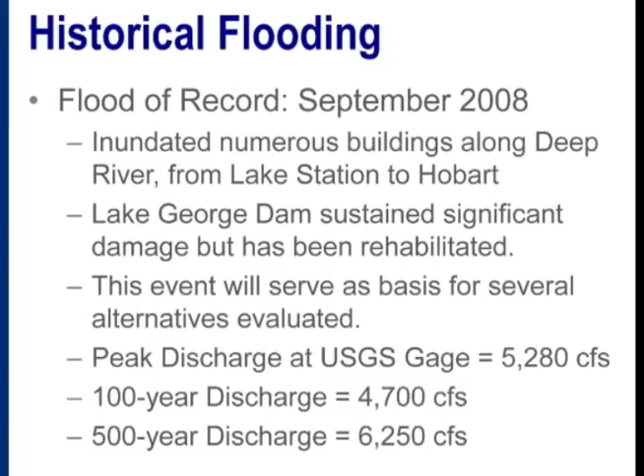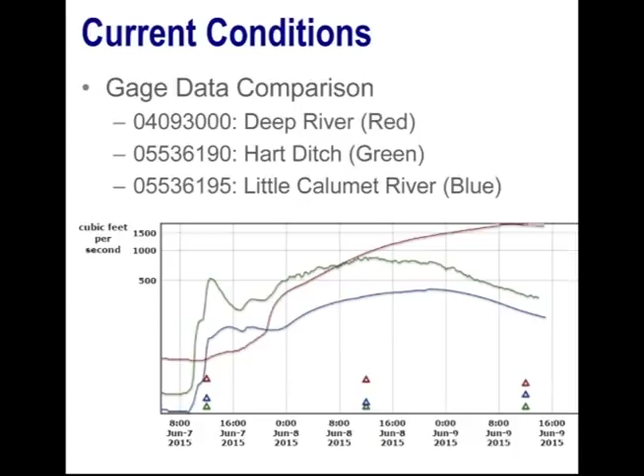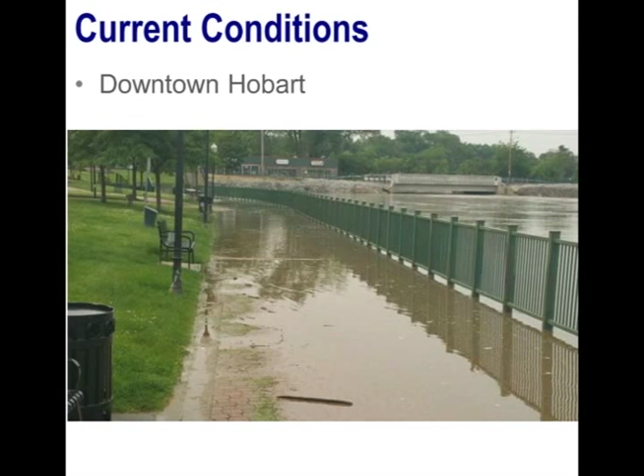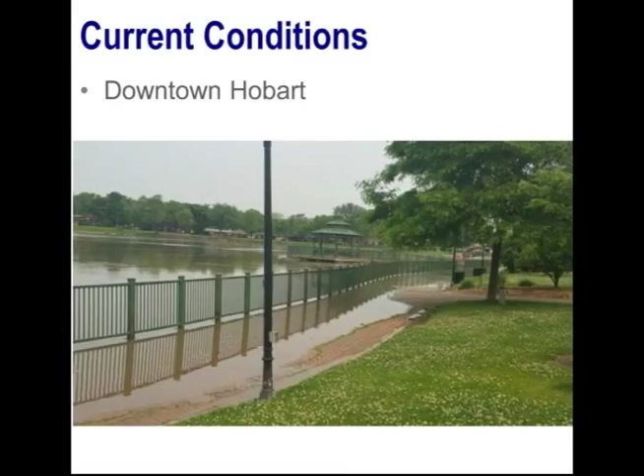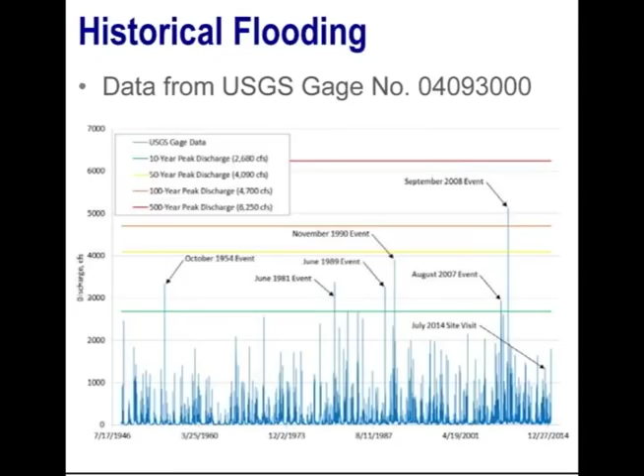Obviously, as I mentioned, there is a need to better understand what's going on with Deep River, and in order to do that, the first thing we did was collect several previous studies. We don't want to be duplicating any effort and want to make use of previous studies, of course. We also collected several hydraulic and hydrologic models that had been prepared by the DNR and the Corps of Engineers and the MWRD, and also FEMA.

I'm going to go through some of the key points of those previously established hydraulic models. I think our goal going into this was that we could make use of one of these previously created models and just modify it, update it, and work from it. The DNR's model is considered the effective model for the reach, and generally speaking, it has not been updated in quite some time. So when you look at the cross sections of the stream that are used to define the system, they appear to be based off of some approximate contours.

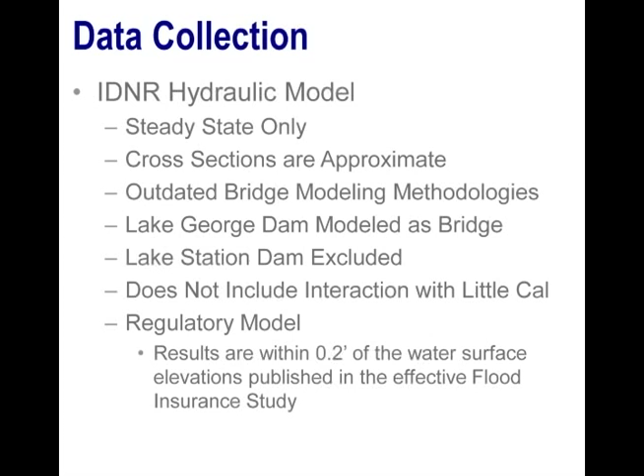We also obtained a hydraulic model from the Corps of Engineers. This model had really similar cross-section geometry to the DNR model, so again, very approximate. But there were some really good things that could be taken out of this. The first thing is that it included the interaction with Little Cal. The DNR's model doesn't—it isolates Deep River. And we'll talk about that in a little bit too.

If I could add, I believe that was all flown in the 90s. I don't know how much of it was updated in the model, but a lot of the design work for the federal system was done off aerial topography flown in 1990. Thank you.

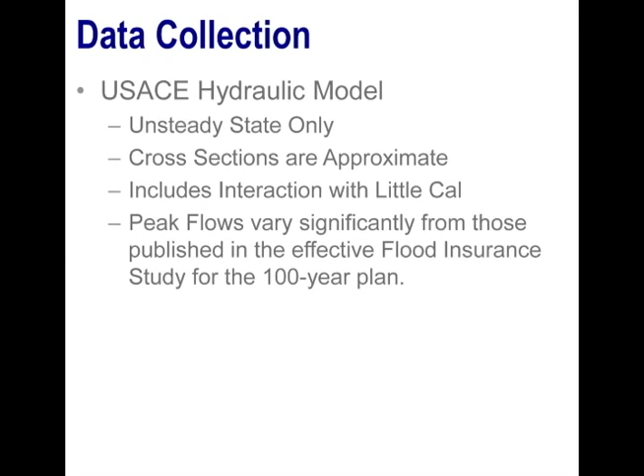So the last hydraulic model that was obtained was from FEMA, and actually FEMA's contractor, and it was pretty much the same thing as the DNR's model, which is to be expected. Actually, FEMA's model seemed to be less up to date—there were some changes made to the bridges in the DNR's model that didn't show up in FEMA's model.

We also collected some hydrologic models, which are useful for modeling the September 2008 event and some other historic events. But I think you're gathering what I'm getting at, and that is there are a lot of discrepancies with the models that had already been created, and the data was old. There were old methodologies being used, etc.

So we decided that rather than trying to work from one of the previously created models, it would be better to take a fresh start. So with the hydraulic model, there are two main components. The first one is what we call the geometry—basically, you need to define the stream, hydraulic structures, things that impact the flow.

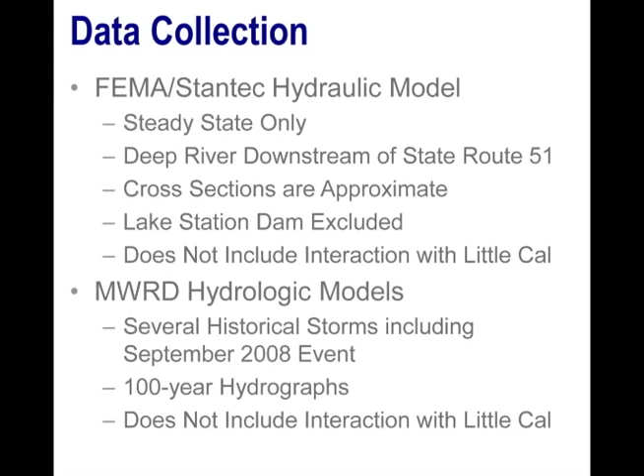And then I wanted to show you the improvements that were made by conducting the survey data. Because when we create a more accurate representation of the bridges and the dams and whatnot, we are more accurately estimating the losses associated with each of those bridges, and we're creating a more accurate model overall.

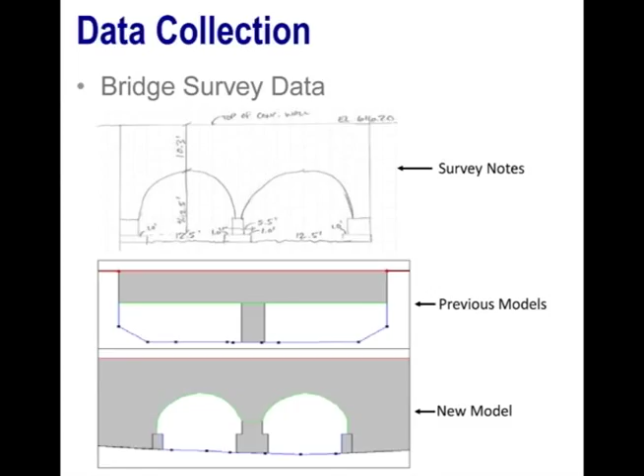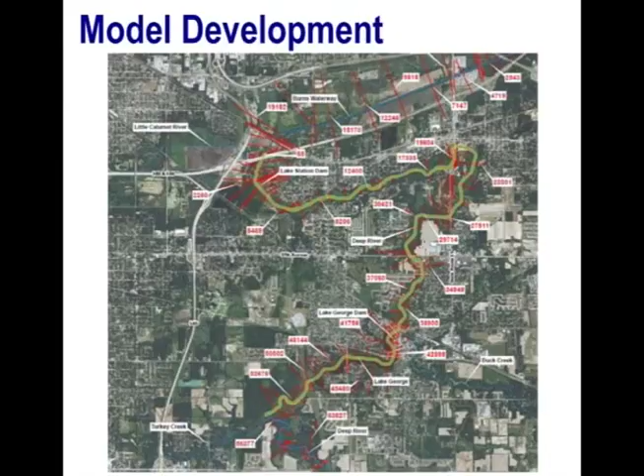This model that we created included 16 miles of Deep River and also Burns Waterway. To define the channel, we cut 126 cross sections, and there were 24 bridges, those within the study reach were surveyed in detail. And of course, we've also got the two dams within the study reach that were included in the model.

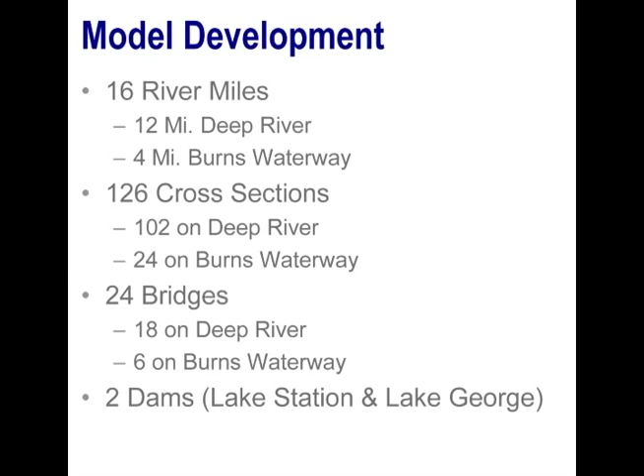We created both a steady state and an unsteady state model. The steady state model is what's required for regulatory purposes, and that's just a snapshot—you take your peak discharge and look at what that profile looks like. But the unsteady model allows us to route a hydrograph, an actual event, through, and we can look at the impacts of loss of storage or addition of storage and how that could be beneficial.

Because MWRD had some comprehensive hydrologic models already created, we did not repeat any of those efforts. So we did not develop any new hydrology as part of this.

Something I want to note is that we used the LiDAR data and the bathymetric data, and we used software that enabled us to create a georeferenced model. Basically, that helps us on the backside because we can automate the floodplain mapping.

I'll be showing you some figures showing this area would have been inundated based on our modeling results. Well, that was possible because the model was georeferenced, and being able to develop those inundation maps, it can be a useful outreach tool also.

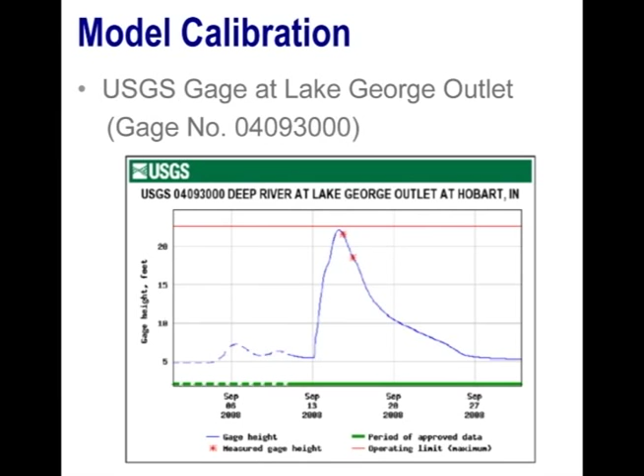One thing that occurred during the September 2008 event that ended up benefiting us when we were looking at this model is that the USGS went out and collected data on the high water marks. They went out and surveyed all these high water marks, and there were 28 of them within our study reach.

They categorized them based on the accuracy of the survey. 27 of them had good ratings, which is within 0.05 of a foot. The last one was a fair rating, within 1/10 of a foot. So pretty good survey data.

It's not all that common that when we're developing a hydraulic model, we have this quality of data to use for calibration.

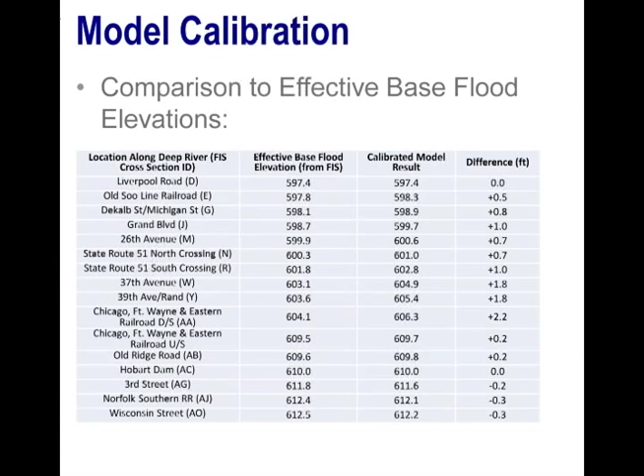Looking at the numbers is one thing. I think the better question to ask is, how does that impact people? How many people would be impacted by that? So I pulled together an inundation map.

According to FEMA, yep. FEMA's the one that makes everybody pay flood insurance. Right, so that has an impact on everybody sitting here that lives in this marsh. So how old is that data? Does it change like the other data?

It has not been updated. Since when? The elevations have not changed since the 70s.

So, wanted to know how does the inundation area based on our modeling results compare to what FEMA thinks would be inundated during an event. Generally speaking, although we had that increase shown in that table of 1 or 2 feet throughout much of the study reach, those increases were generally in areas where the floodplain is fairly narrow, so there weren't necessarily properties added to the floodplain.

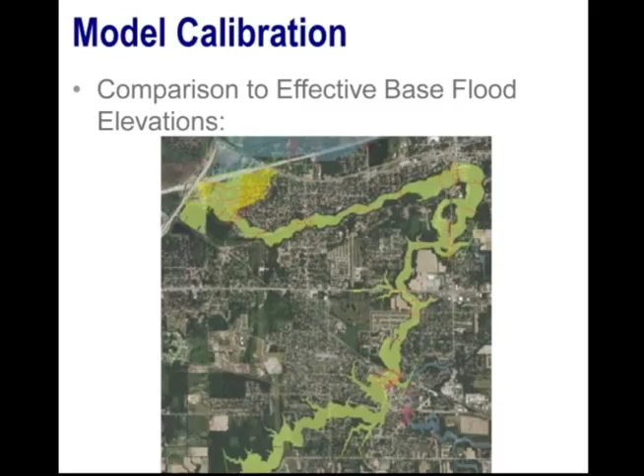Well, on that note, in order to update the maps, you need to prepare a letter of map revision to include that area and submit that to FEMA.

All right, so enough about the model development. Now that we've got this model and it's calibrated, we're ready to look at some of the alternatives, with the goal in mind, of course, being to reduce the flooding.

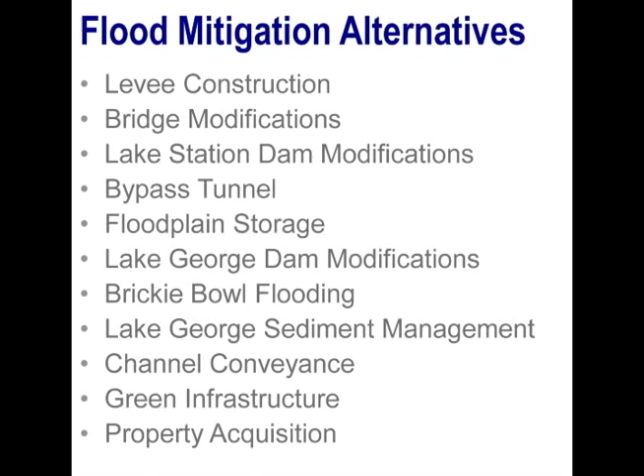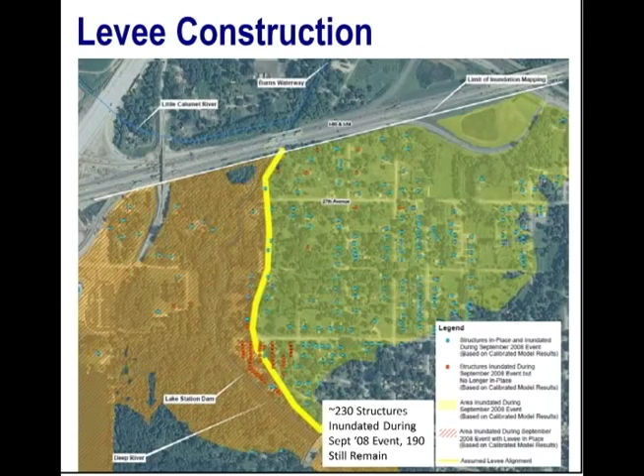I'm showing in the bright yellow here the alignment of the levee that we assumed. So what we're showing is the unhatched areas back here could potentially be protected if such a levee was constructed.

Normally, when you construct a levee, you're taking flood storage out of the system, so you might anticipate seeing some high water level increases due to that. But that area is extremely flat, and the storage that was removed was only about 1% of the total volume, so we didn't see any increases. The other factor that led to no increases in the base flood elevation was the fact that there are some significant tailwater conditions for Burns Waterway and the Little Cal and that whole confluence.

So when you look at some of the profiles of Deep River down there, it's flat for quite a distance. Those two things together led to a modeling result that showed you could construct that levee without causing any increases in the base flood elevations. But now what that means is that compensatory storage would not necessarily be needed. If such a levee was accredited, it would mean lower insurance rates for properties behind it, and it also removed the mandatory insurance purchase requirement.

There would be some properties that would need to be acquired in order to construct it. There's about 20 of them. And there are limited drainage infrastructure components in place right now, so you definitely would need to construct some of that, pump stations, storm sewer leading to pump station, that sort of thing, yes.

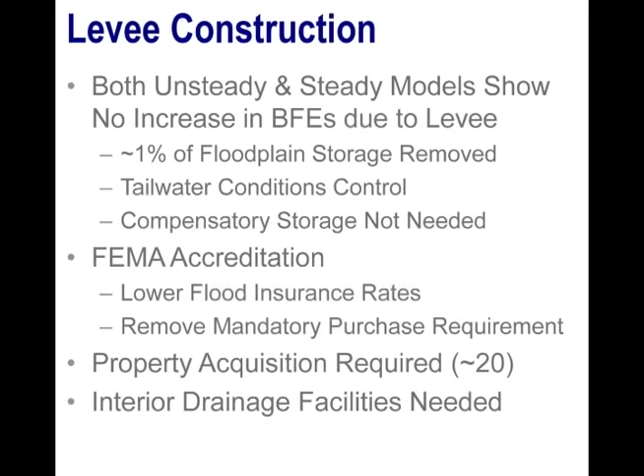Moving along to the next alternative that was looked at, something that really stood out when we were developing the model was the fact that there are several bridges that are creating restrictions which lead to higher water surface elevations upstream. An example of that would be the Chicago-Fort Wayne and Eastern Railroad Bridge, which is just downstream here. When you look at the hydraulic profile, this is a snapshot of some of the modeling results, and this was for the September 2008 event.

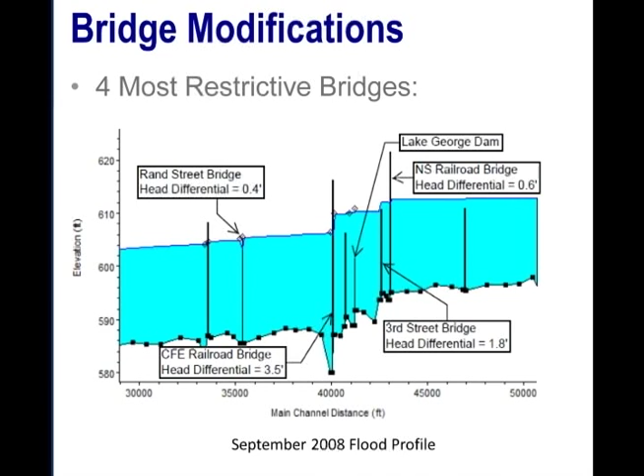You look at the water surface going up by 3.5 feet across that bridge. And we look at that as, if that bridge were reconstructed to effectively eliminate that restriction, that means that the water surface elevation upstream could potentially be 3.5 feet lower. 3.5 feet is significant, okay? And guess what's upstream? Downtown Hobart. So that was the kind of thing that we looked at for the 4 most restrictive bridges.

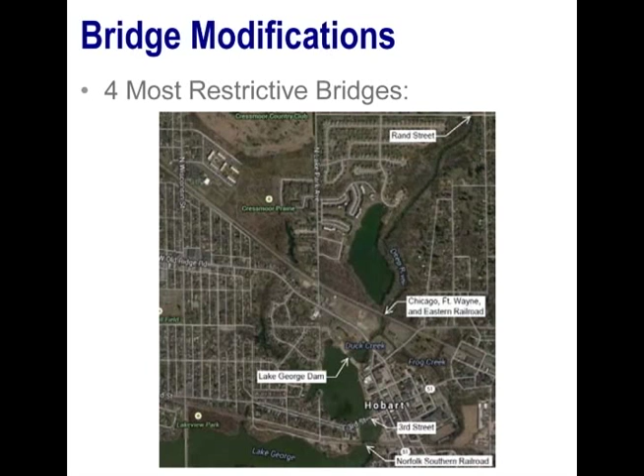The first, of course, is that CF&E Railroad Bridge. The next one is 3rd Street. And then the railroad bridge just upstream of 3rd Street, right here. And also the Rand Street Bridge. So those 4 bridges created the most significant restrictions. And just taking a look at those in plan views in perspective. So we're, let's see, right down here. Yeah. Okay.

So we looked at those bridges individually to say, if this one was improved, what would the benefits be, etc. But we also looked at those 4 together to say if all 4 of them were improved to effectively eliminate the restriction, how much lower would the water surface elevation have been during the September 2008 event for this area? And created some inundation maps based on that.

And you can see that the flood inundation area is certainly reduced. Actually, when you take out all 4 of the restrictions, you see a drop in water surface elevation of nearly 4 feet for this area, and it tapers off to about 2 feet, 2.5 feet for other portions of Lake George.

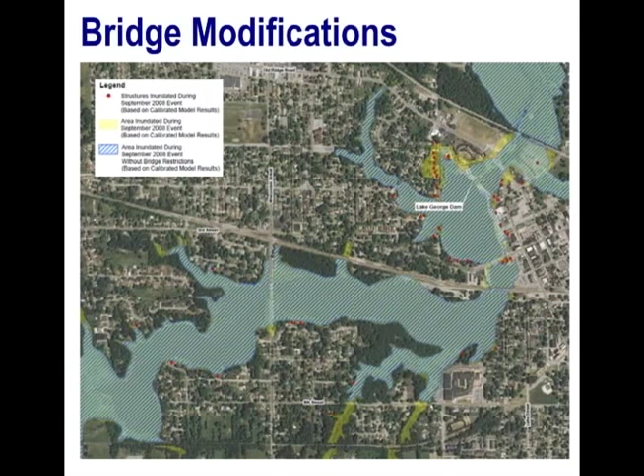If we take a closer look at that Chicago-Fort Wayne and Eastern Railroad Bridge, some of the things we considered there were, what if the bridge was entirely removed? Then you're talking about lowering the water surface elevations upstream by 3.5 feet for the September 2008 event. In order to eliminate the restriction, you need to provide an opening of about 70 feet. But we would recommend that you actually bring it back to the full bank width to prevent erosion and whatnot. And that would be 110 feet.

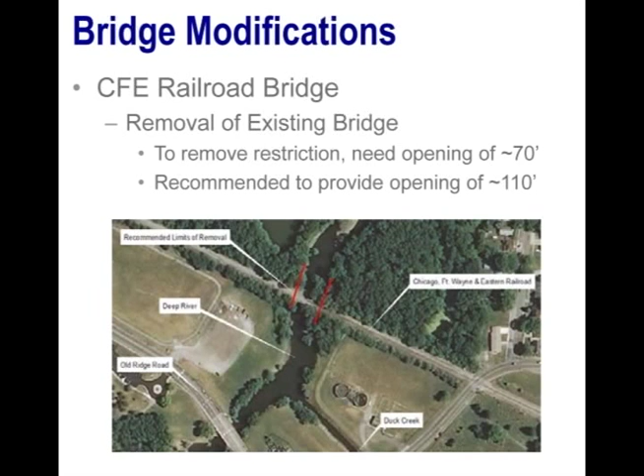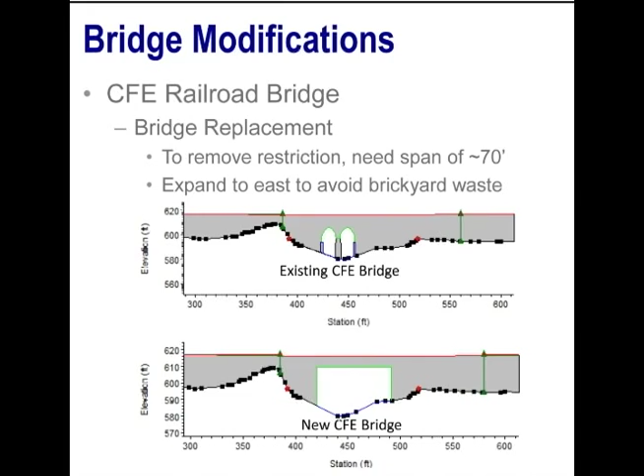And then if we move a little bit further upstream to talk about 3rd Street, when you looked at that profile of the September 2008 event, you can see that 3rd Street had a head differential of about 1.8 feet. So that means that the water surface elevation upstream of 3rd Street, in other words, for the majority of Lake George, was about 1.8 feet higher than it was downstream. And one of the other crossings that is upstream is Wisconsin Street. I'll talk a little bit more about that in a moment.

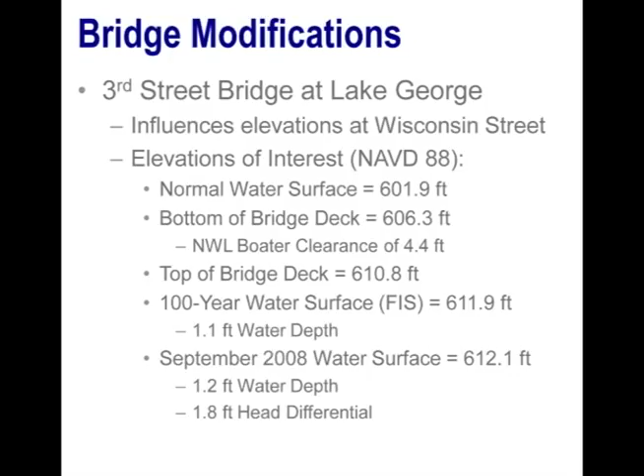But just looking at 3rd Street, the existing crossing has a current boater clearance of about 4.4 feet. And for the 100-year event, based on the flood insurance study, there's about 1.1 feet of water depth over the road. So of course it needs to be closed. And for the September 2008 event, we're looking at just slightly more water on the road. This is a photo from the September 2008 event. So the modeling results were pretty close there.

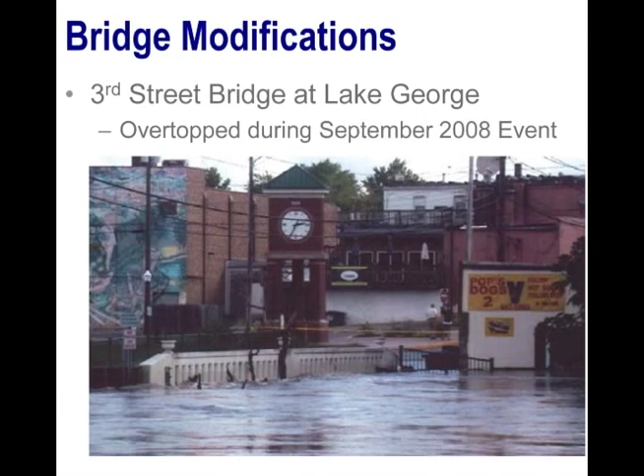I also want to just point out some of the debris that is accumulated on the bridge. We'll touch on that too. So if 3rd Street were reconstructed to effectively eliminate the restriction, it would mean lower water surface elevations for much of Lake George. And in order to eliminate the restriction, we looked at a case where the bridge was raised, but also lengthened. And it would take nearly twice the length of the bridge to eliminate the restriction. So that's pretty significant.

The new headwater elevation would of course then be lower, and the road elevation would be set to be at least a foot above the headwater elevation. That's an INDOT requirement for roads in this category.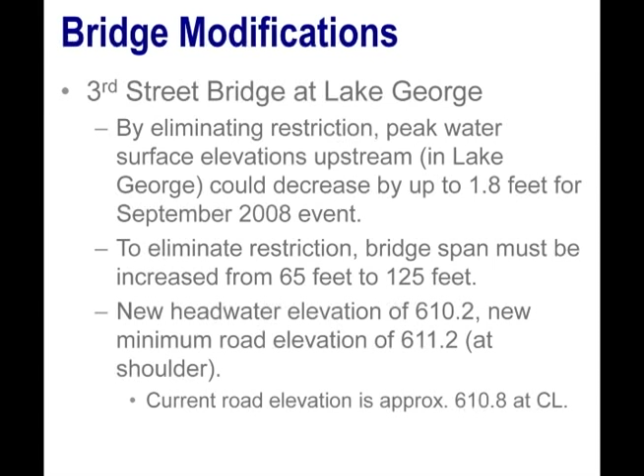So if we move a little further upstream and look at Wisconsin Street. So Wisconsin Street's located right here. Again, we're sitting over here. As I mentioned, 3rd Street has a direct impact on Wisconsin Street. And Wisconsin Street is a critical route to the hospital, which is located down here. And it's frequently closed because of overtopping.

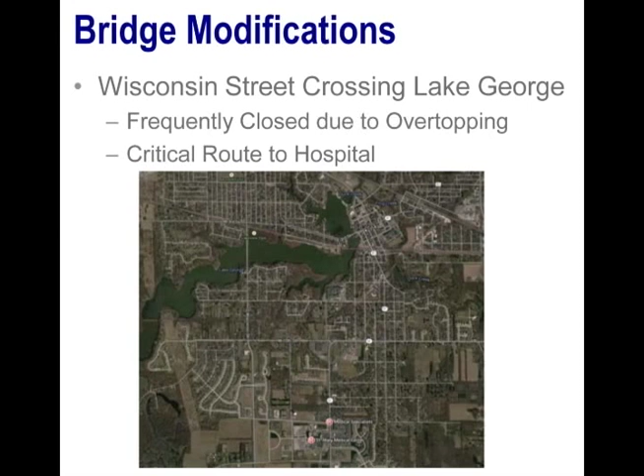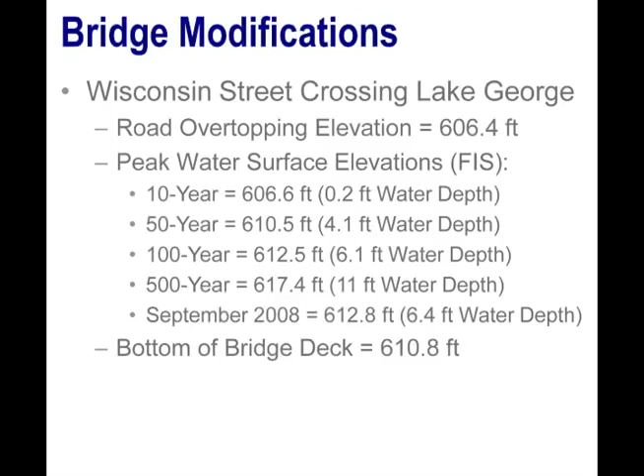And just to throw some numbers at you, you can see the water depths for some of these statistical events. For the September 2008 event, there's approximately 6.4 feet of water depth over the lowest point of the road on Wisconsin Street. And this is just a schematic from the model, which again shows the depth of the water. So when we talk about Wisconsin Street Bridge, actually the bridge deck, the top of it, was dry during the September 2008 event. But it's the causeway, which is significantly lower, which forced the closing.

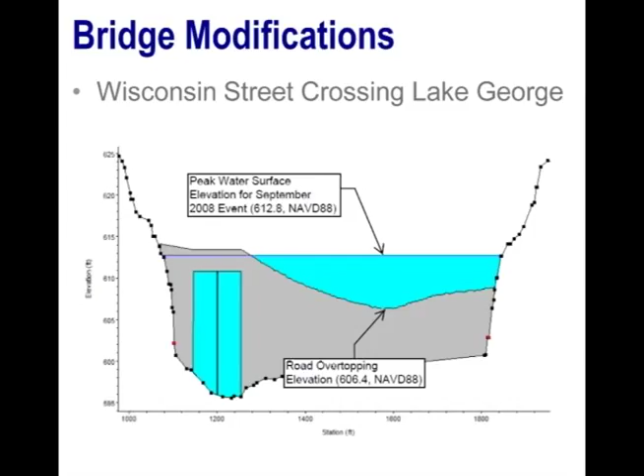And this is a photo. I know it's pretty grainy, but once again, it shows you the extent of the flooding during the September 2008 event and how the inundation pretty much went right up to the bridge deck.

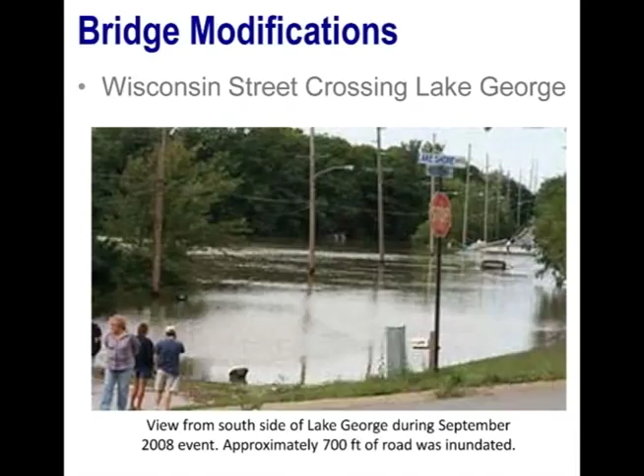So here's a potential solution at Wisconsin Street. The logical thing to reduce the closure frequency would be to raise the road, right? But by doing that, right now the road is acting like a weir. It's overtopped frequently. If we raise the road now, we're blocking the flow. So we can't just raise the road because now you're going to increase water surface elevations upstream. You're going to create basically a dam.

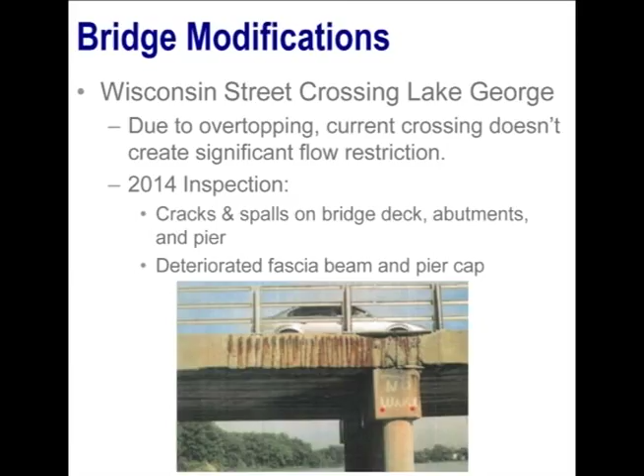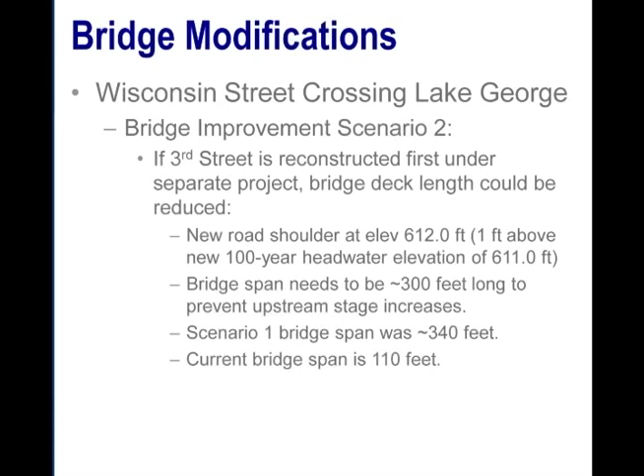So if you were to raise the road to keep it operational during the 100-year event, you would need to reconstruct the bridge that's there to increase the capacity of it. And the bridge that you'd need is about 3 times the length of the existing bridge. That's option 1. Option 2, we look back at 3rd Street and say, okay, if 3rd Street is reconstructed to eliminate the restriction, now we've got lower water surface elevations at Wisconsin Street, and that bridge length can be reduced a little bit more.

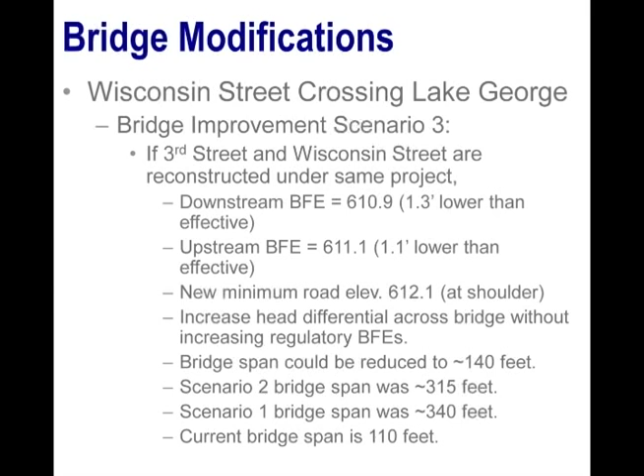Option 3, the most prudent thing to do here, is to bundle the 3rd Street and Wisconsin Street projects together, permit them together. And what you're doing there is you can get a bridge span at Wisconsin Street that is only about 140 feet long, which is not much longer than the existing bridge. So with this solution, if 3rd Street and Wisconsin Street are permitted together, you take advantage of the benefits of improving 3rd Street and kind of eat up some of those benefits at Wisconsin Street to have an overall shorter bridge at Wisconsin Street. And with both of those roads being reconstructed, now you've got them elevated to at least a foot above the 100-year flood elevation.

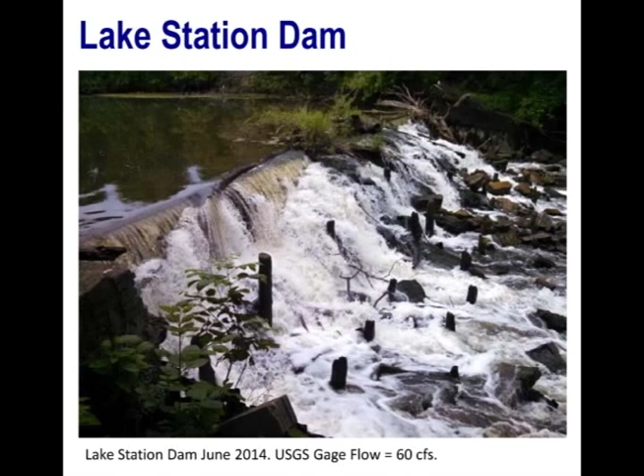If we go downstream, now I'm getting into some of the alternatives that we looked at that really didn't show a lot of benefits. So I will go over them a little bit more quickly. So looking downstream to the Lake Station Dam, here you've got the existing structure. This was during a site visit last summer under a normal flow condition. This photo was taken from approximately the same location just a month later.

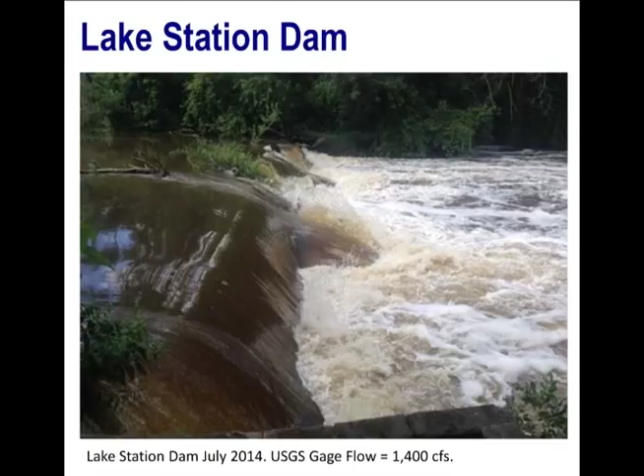And what we see here is you've got some really significant tailwater conditions. You've got the water level here quite a bit higher than it was just a month earlier. And what you see is as the flow increases on Deep River, it pretty much drowns out the Lake Station Dam. And the dam's really not doing much. And that, for us, confirmed or explained why this dam is entirely excluded from the effective model, because it's not doing anything for the statistical events, the 10-year, 100-year, etc.

But we looked at, what if you were to remove the Lake Station Dam? And also, what if it were replaced with a different dam that was capable of drawing down the upstream water surface to provide additional storage during a flood event?

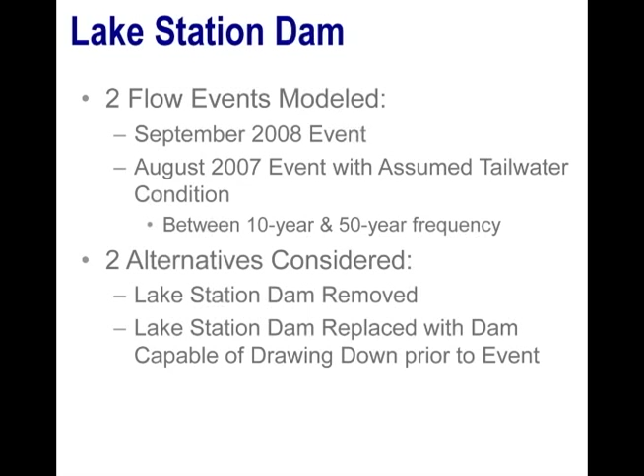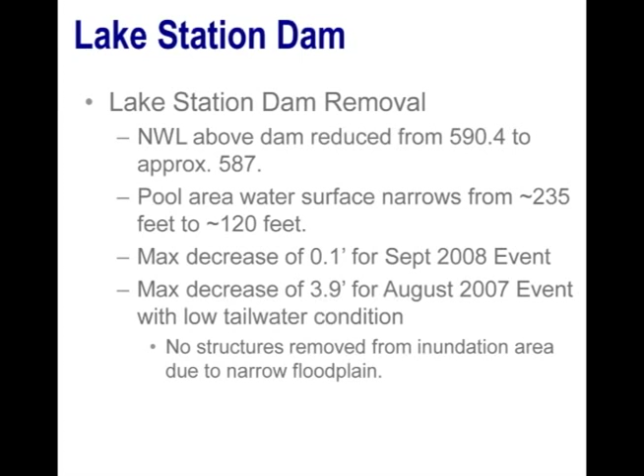Short story is that neither of those options gave us much for benefits upstream. For one of the events that was modeled, we did bring the water surface down by almost 4 feet, but in this portion of Deep River, the floodplain is extremely narrow, so we weren't actually taking properties out of the floodplain. And the likelihood of the event that's based on occurring is not very high.

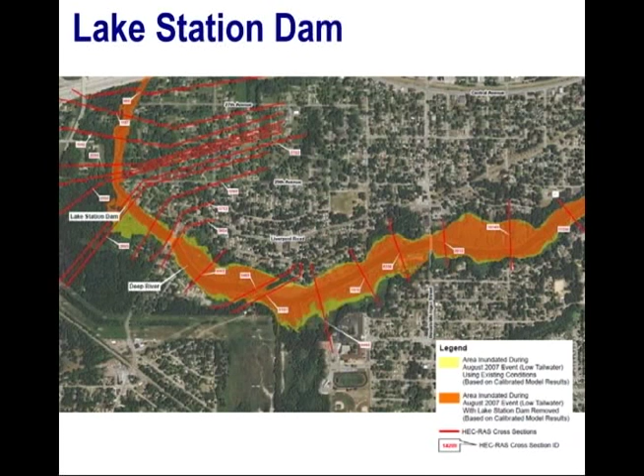If the dam were replaced with some sort of drawdown structure, here the results were nearly a foot of decrease in the water surface elevation upstream. Again, probably not something that's worth pursuing because it didn't result in removal of any properties from the floodplain.

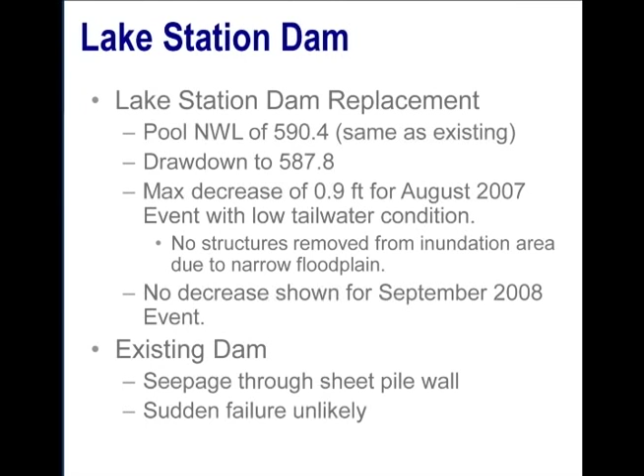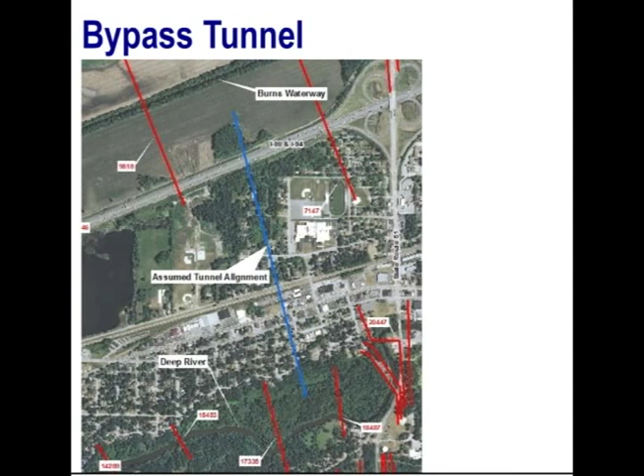We also looked at a bypass tunnel option, and this would shortcut the flow from Deep River down to Burns Waterway, just west of State Route 51. We looked at 2 options there, one with a single 10-foot diameter tunnel, and then we said, well, what if we tripled it? How much benefit could we get? But with either of those, the benefits were minimal, half a foot at most, in the upstream areas.

And constructability of 3 10-foot tunnels under that developed area is not very good. But even with that half-foot decrease upstream, again, it did not result in the removal of any properties from the 100-year floodplain.

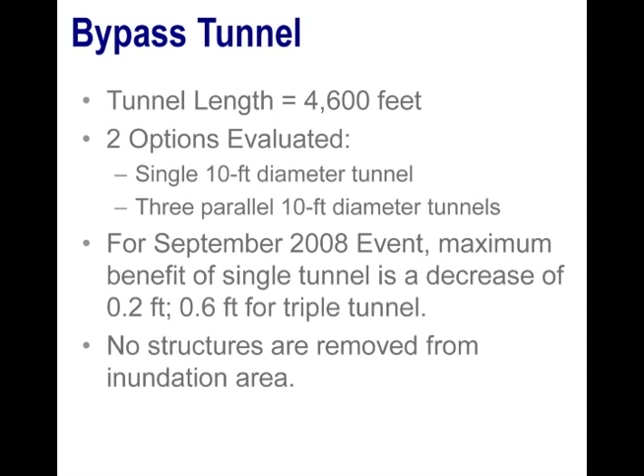We also looked at the addition of storage in 3 primary areas. One we called Rosser Lake Storage, another Indiana, Arizona Storage, and the third one was 37th Avenue Storage. Wait, can you go back to that map, please? Yep. Is there any storage before the start of the Deep River study? Are you talking about upstream? So in this Turkey Creek area, to help stop all of the water from getting here? Yep, I will talk about that. So our approach was to look at, are there locations that are identifiable? Can we add storage in those spots?

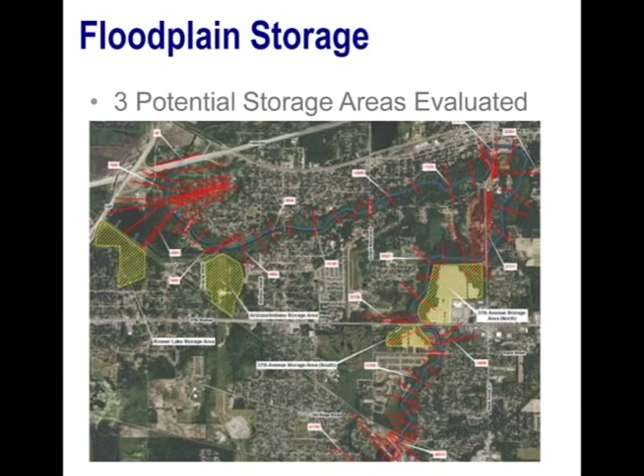And for the Rosser Lake Storage area, I'm going to flip back once. We've got a pond here, a lake here, a lake here. That's over by 65, right? Yes, it is. The normal water level of Rosser Lake is about 5.5 feet higher than it is right here. So the thought was, what if you did a drawdown of this lake in anticipation of a flood, and then you've got this extra storage.

From where? By drawing it down. But where's the water that's going to fill up the storage capacity there coming from? Not here. You'd have to create a connection across the railroad here, and then yes, it would come. But the storage that was added there is about 600 acre feet for the September 2008 event, and it didn't reduce the peak water surface elevations at all.

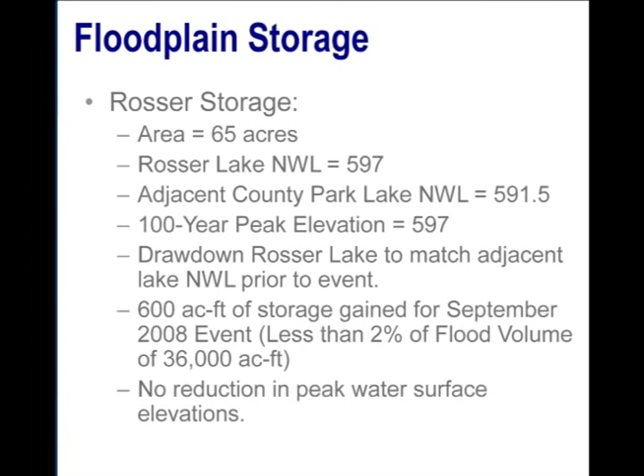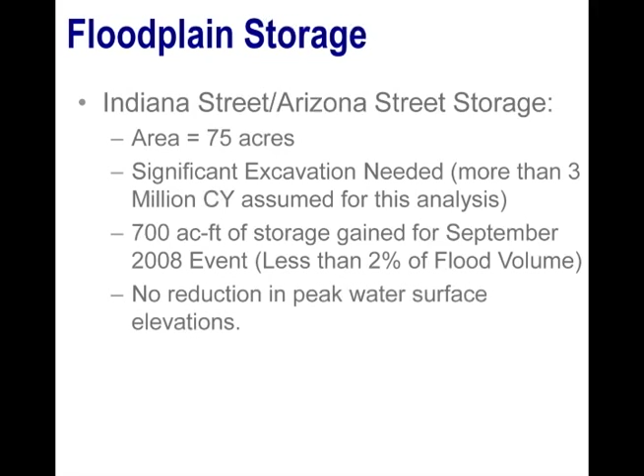The next area was a little bit further upstream. This is an area that's currently high ground, so in order to construct a storage area right here, you have to do a significant amount of excavation, 3 million cubic yards. And here you're adding a little bit more storage, about 700 acre feet, but still no reductions in the peak water surface elevations. Similar story for that third storage area. Here we saw a 1/10 of a foot of reduction.

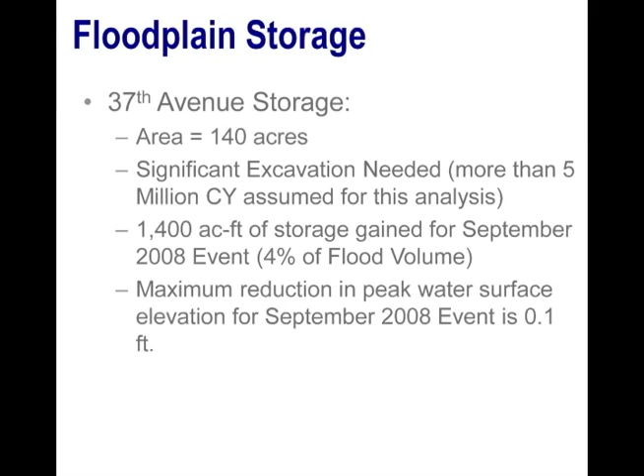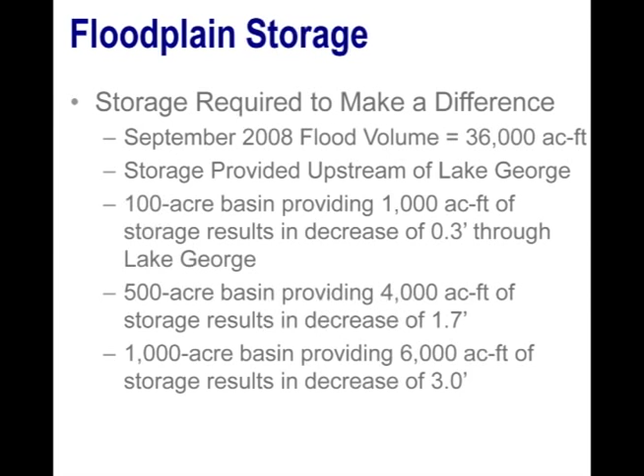So the question came up, we're adding all this storage, why aren't we seeing the benefits? Or what would it take if you were to construct something upstream? So we played around with that too. We looked at adding a 100-acre basin upstream of Lake George. That added about 1,000 acre feet of volume, but it only resulted in 3/10 of a drop there. We've never studied what happens that way. How do we know that data? This was by adding a constructed basin.

You could say, what if you were to add 100 basins to come up with the same volume? I'm from the region, so bear with me. If you don't know how much hard surface and paving has gone on in 30 and Crown Point and all of those areas before it gets to Deep River, and you don't know what that volume is, how can you make the assessment that that's the only benefit you're going to get?

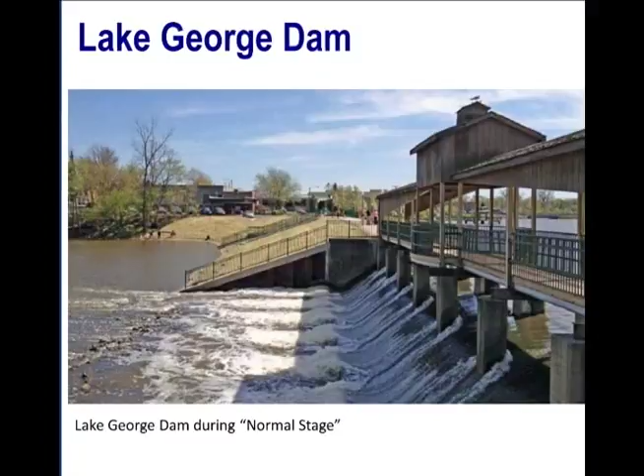We actually do know what the volume is. If you go back to the hydrograph, that takes into account existing conditions, so all those surfaces are already included. So everything going through Merrillville and Turkey Creek has already been calculated to get us there? Right.

And that's the model. That's when we run this 2008 event. That's the hydrograph we showed. That is the existing conditions, and that's why we use that hydrology, because that accounts for all that stuff.

There are other things that kind of complicate this Lake George drawdown option. The first one being that if you draw the lake down 3 feet, now you only have about 1.5 feet of water depth. The next thing is that there are a lot of retaining walls along the lake, and those could be damaged if the hydrostatic pressure changed significantly like that.

We also showed you that hydrograph of the September 2008 event. The lake level was up in just a couple of days, so that may not give enough time to react and implement some sort of plan to draw down the lake.

And then the last thing that would make this complicated is that there is a court-established lake level in place, too, based on the dam. The lake cannot be intentionally drawn down below this elevation.

So you have to keep the lake level the same even though it floods? Can't go below 601? Right, even if you get 10 inches of rain? How old is that rule? 1964?

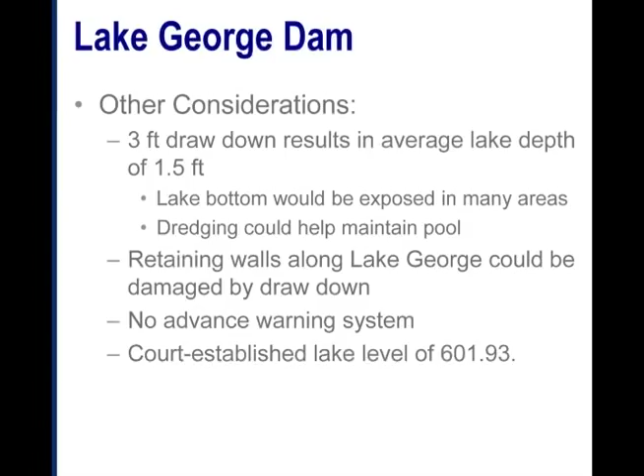I should clarify that raising the bridges is a solution that we do see providing benefits, not just because now the bridges are higher, but because by constructing them higher and reducing the restrictions, you're lowering the water surface elevation upstream. So it's moving the water faster.

Kind of a side note here on sedimentation in Lake George. That bathymetric survey we did was compared to the last dredging effort in 2000, and it showed that 70,000 cubic yards of material has accumulated in the lake in the last 15 years or so. When we started this project, Craig said you've got to find a way to get rid of the sediment before it gets to Lake George. But the reality is that Lake George is the sediment basin, because in order to settle out the fines that are accumulating, you need a basin the size of Lake George to do it.

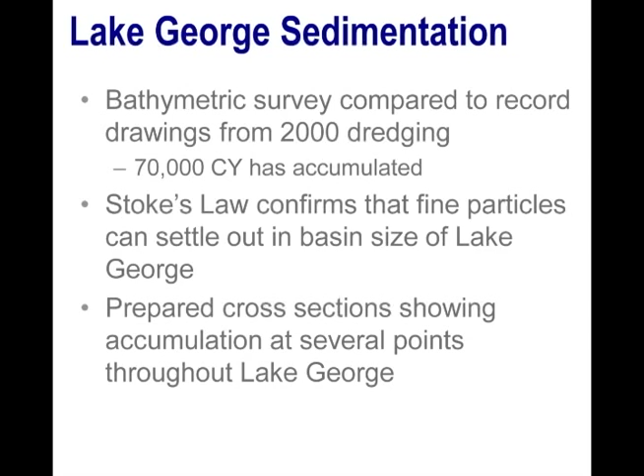So the thing is, sedimentation is going to continue to occur, and capacity goes down unless you dredge it all the time. Correct—sorry to steal your thunder. No, it's fine.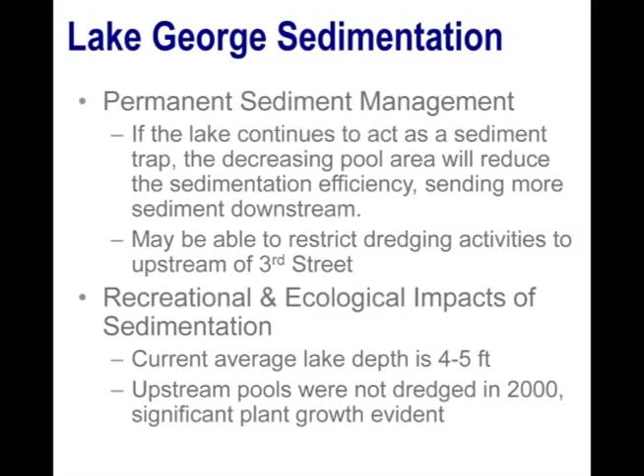There are other things to consider too. The current lake depth is about 4 to 5 feet, and the upstream pools further upstream were not dredged. These pools here were dredged in 2000, these were not. If you look at that historical photo, you see that this didn't used to be wetland—this used to be lake up here. And now it takes permits to do anything with that wetland.

I know, yeah, 500, yeah. You'll never be able to. Just so everybody knows, if you're inside of the levee and there's weeds and stuff in there, that's a wetland—you have to get a permit to work on it. Yes, inside the levee it is absolutely protected, yes.

But what I want to show here is that if you do not do any dredging in Lake George, this is the kind of thing you should expect to see happening in the rest of the lake—the conversion over to wetlands due to sediment accumulation. The last time it was dredged was in 2000, about 15 years ago.

So after all of this, with everybody continuing to pave, what would the frequency of dredging have to be to increase it? Why don't we go deeper?

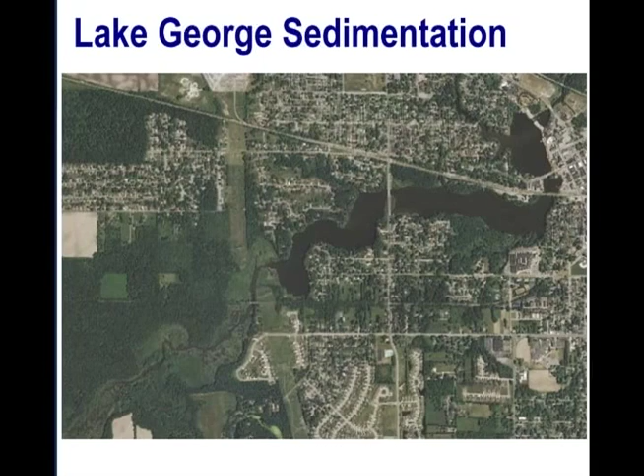We've done already, right? A couple other things, just looking big picture, could we improve the conveyance of the channel on Deep River to, like you said, get the water through faster and reduce the flood elevations? Just looking at a really extreme case to see what the benefits would be, we looked at what if all the trees were cleared along the study reach to reduce the losses. That only resulted in a decrease of 0.8 of a foot for the September 2008 event. And of course, there are other considerations with clearing trees, the environmental aesthetics, etc. So, not something to pursue further. I'm gonna skip over that one.

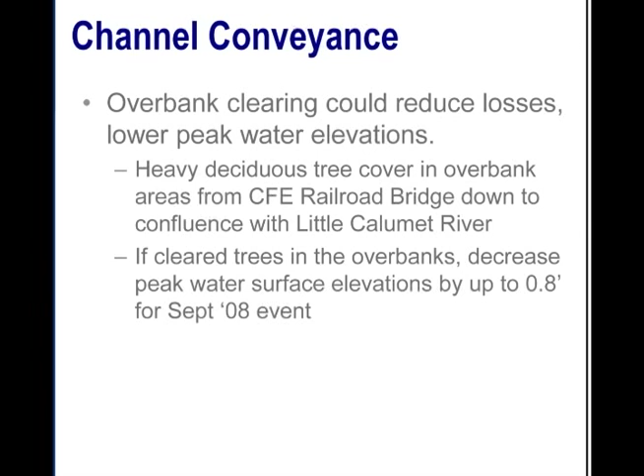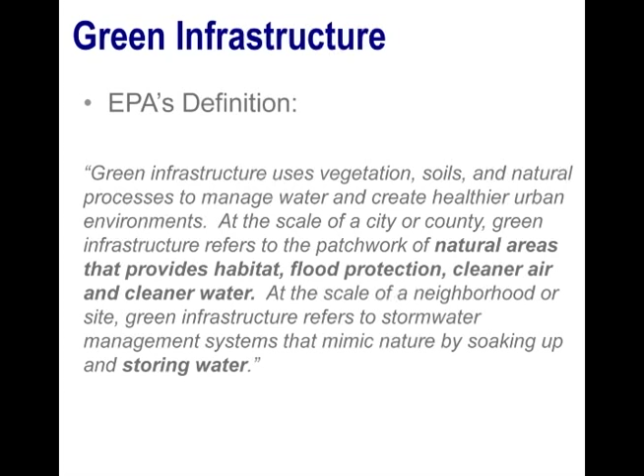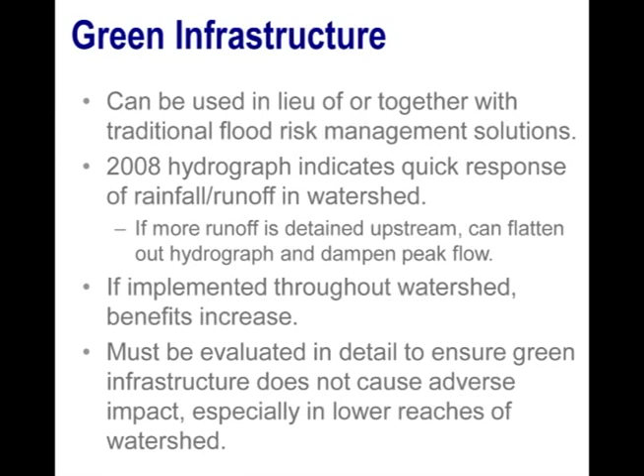So, this is something that what you're referring to is the use of some green infrastructure upstream. When we're talking about green infrastructure, we're talking about things that can provide habitat, flood protection, and cleaner water, and act to kind of mimic nature by soaking and storing the water during a flood. These things definitely could be implemented and used together with some of the flood risk management solutions that we're looking at. One of the really promising things is that when you look at a hydrograph, that significant peak here is a perfect case of where green solutions could really help, because they can hold that water upstream longer and dampen the peak discharge that you'd see on the stream. You have to be careful though with implementing green infrastructure, because it's possible that if the timing's just right, you're actually making things worse by releasing it at the peak time, for example.

We also looked at property acquisition and structure elevation, especially in that Lake Station area. So things to consider, things to keep on the table probably. So rather than build a levee, you acquire all the property. Right, but it provides no significant storage.

So where was the number for that? It was green solutions, like everything else. Was there an increase or decrease in the amount of storage capacity? The green solutions were included as more of a concept because that's something to be included in a hydrologic model. Green solutions are kind of, it's one of those things where, you know, what do you evaluate? The whole watershed implements green solutions, or a certain community, so it's really very difficult to quantify.

Each one you do will help in the upper watershed, but like Rachel said, you have to be careful in the lower watershed, because in this lower watershed, you want to get the water out as quick as you can. In the upper watershed, you want to hold it, infiltrate as much as you can. The lower watershed, if you look at the hydrograph, it's very peaky, which means that that's why the water down here, you want to get this out before the upper watershed gets here. You don't want to detain it here and then have it coincide with the peak from the upper watershed, or you could make it even worse.

Yeah, like the rain event we just had this past weekend, was all south. Yeah, and the surge comes. I mean, everywhere going to the river, there's always a surge. If it doesn't rain here and it's raining south in the watershed, it's coming. I mean, I get it.

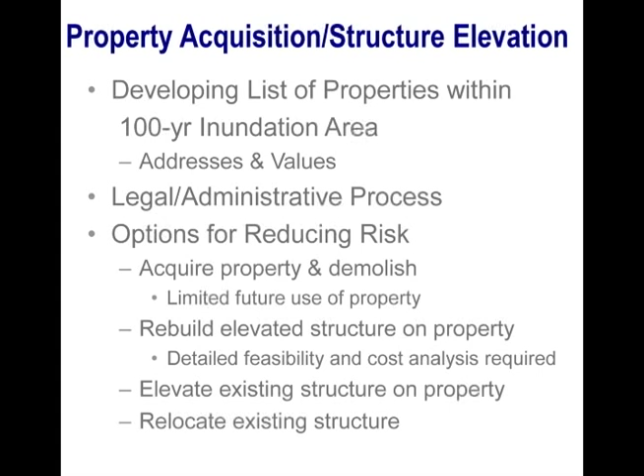All right, some things that could be considered with anything that's pursued in the future is the use of FEMA hazard mitigation assistance. There are programs available to provide funding for some of these projects, which would reduce the risk of flooding to property owners and infrastructure.